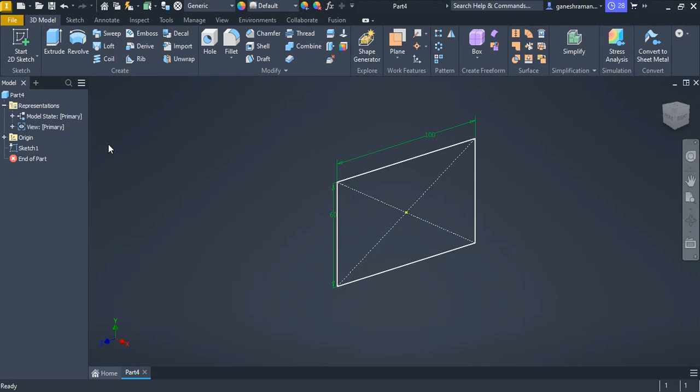First we will make this base part, then make extrude cuts. The radius of this one is R30 and the length is 60 by 100. I'll choose one sketch on right plane, select center rectangle like this, and choose a dimension, this is about 60, enter, and this is about 100. Finish and extrude up to 60, make sure it is symmetrical axis, click OK.

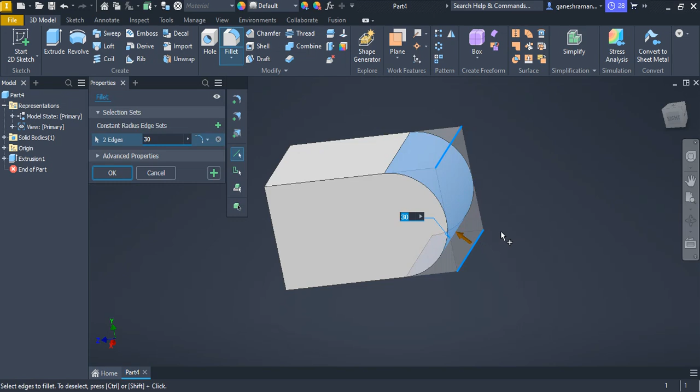Now on the opposite side it is not sharp edges, you can see it is round edges. So for that I am choosing fillet, and the radius is 30. Isometric view.

Next, there are two more fillets which are R5. We will give it here onwards. Fillet R5, select this edge also, click OK.

Now we will make this cutout and this cutout, because it is a through cutout.

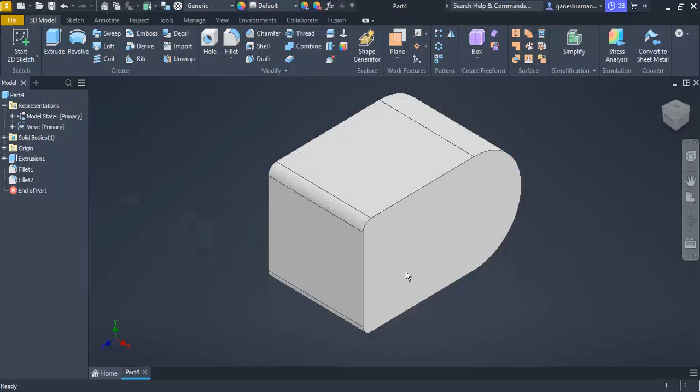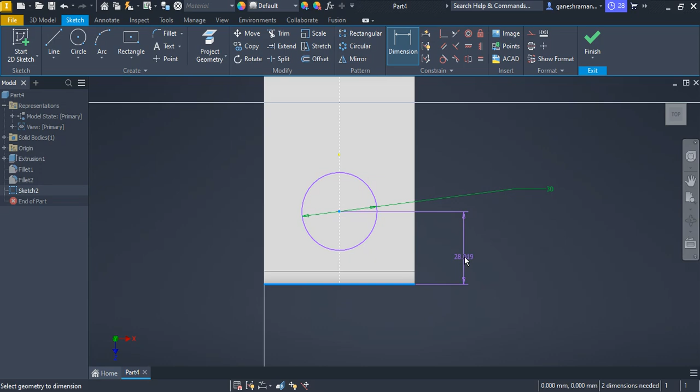Go to this top plane, add sketch, take one circle right here, make one line first and make it into construction. What is the diameter of this circle, which is 30, and what is the distance? Distance is 30 from this to this, which is 30, enter, and make sure this center point of this circle and this line are coincident with each other.

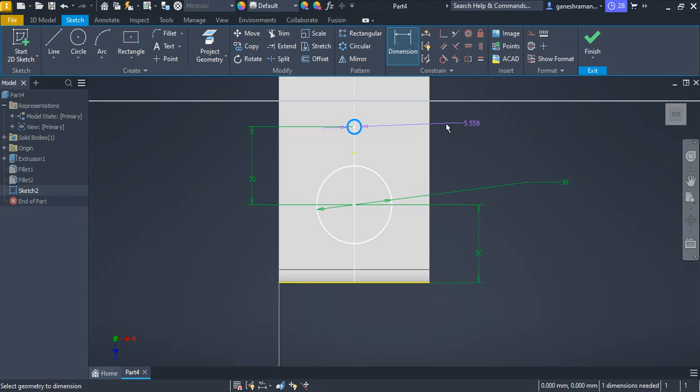We will make this cutout also with 4mm gap, so for that 30. Let's take one line like this and make sure from this center to this end, which is nothing more than 30. Next, make it into construction, select circle which is a diameter of 6, enter, and next 4mm offset, take offset 4mm, enter.

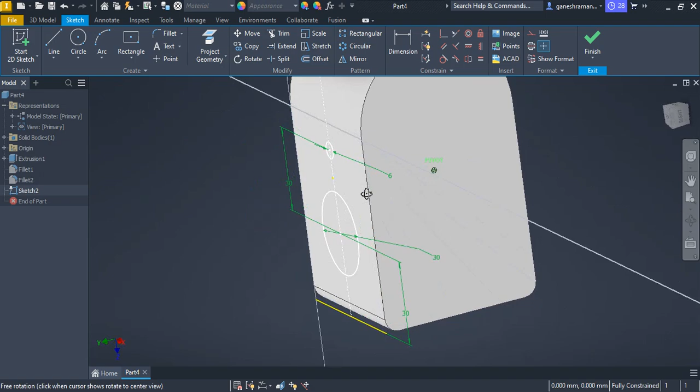Normal view. We just hide it. You can delete it, this line I don't need it. So we will draw it again.

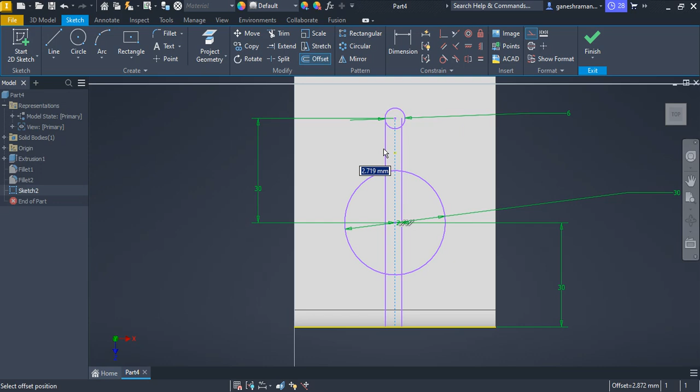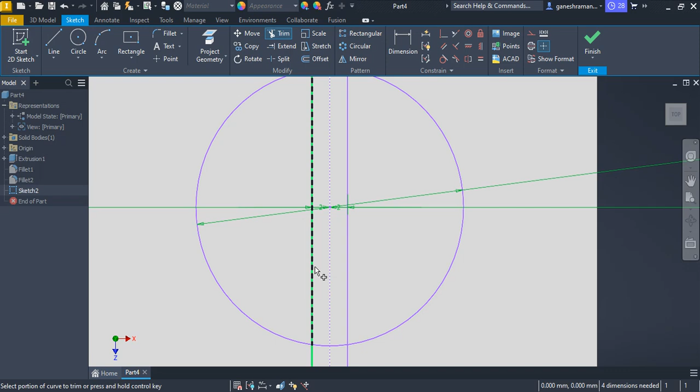Take the offset command and choose 2, enter, select again 2, enter. Now take one more line from here to here, which is for constraining purpose. Trim this and this, trim this also. Let's take one line from here to here, that's it.

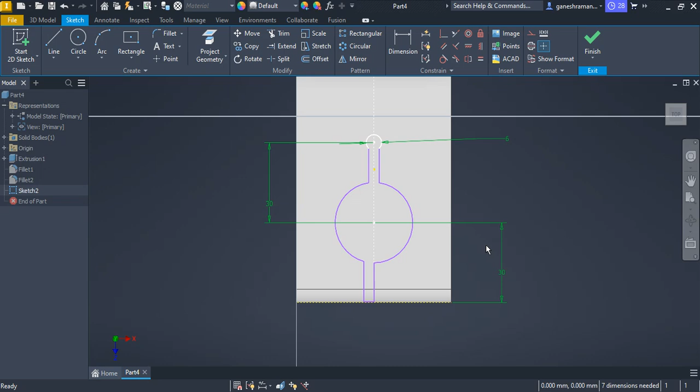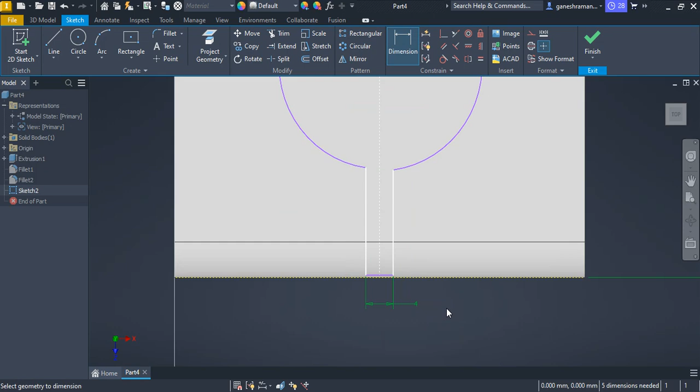Now make sure this center point of this lies in this one, you can see. Symmetry these two lines, the center line, and dimension. Dimension which is not more than, which is 4 only. These two circles are equal.

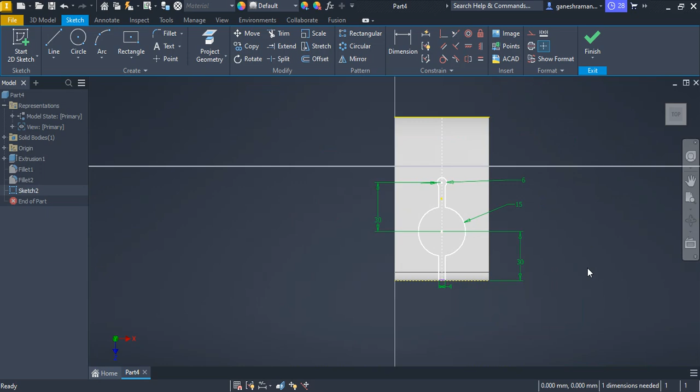Now give the dimension for this, which is diameter 30, so that means radius 15, and collinear these two lines. That's it, every sketch is constrained now, and this is not constrained, we don't need to constrain it. Finish, extrude cut, and remove material up to next, click OK. The first cutout is completed.

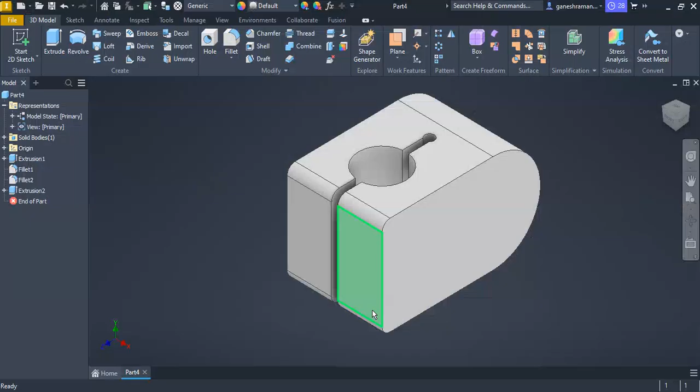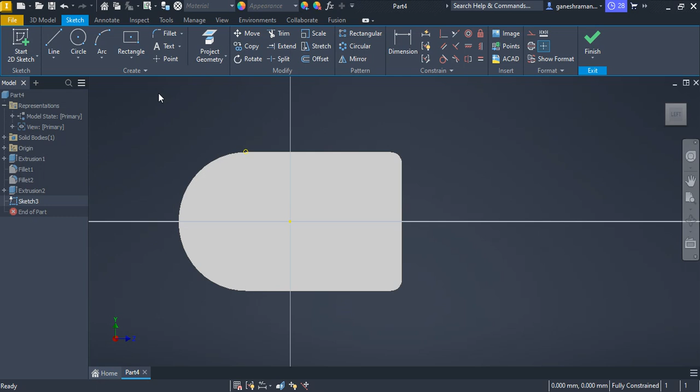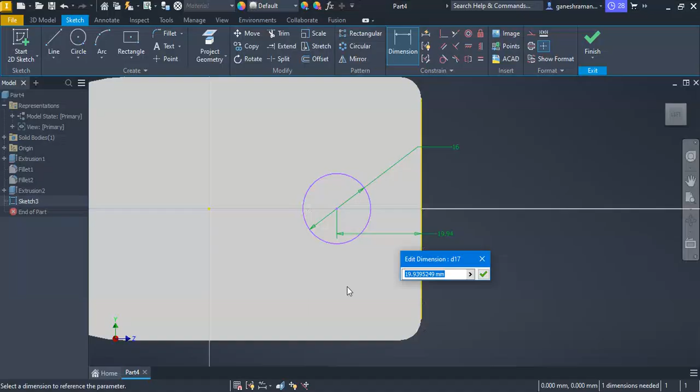Make one line from this edge to this edge, make it into construction, and choose the coincidence, set the center point and this line. Now take two lines, make sure these two lines are tangent. Now trim this and this also. We want to make this cutout only, right?

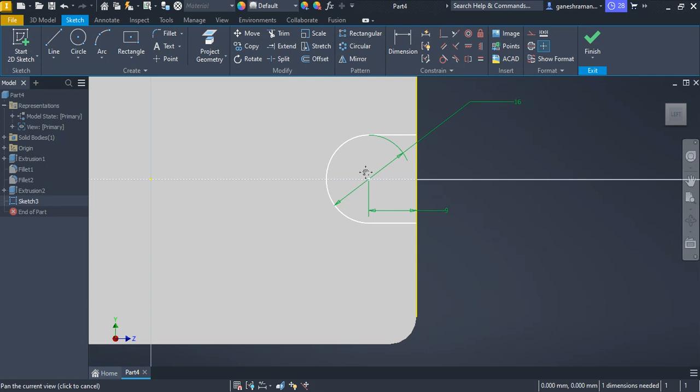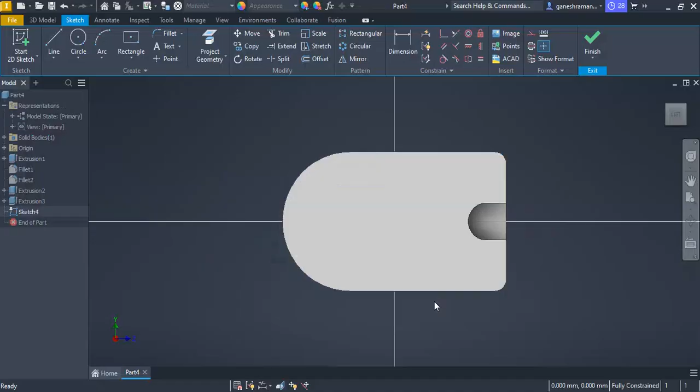Next, finish, extrude 12. Select the surface again, add sketch. What is a 10 diameter circle.

Finish and extrude, remove material up to next, click on OK. So up to next it is not completed, so click on this feature and choose the edit feature option and make sure it is through all, click on OK.

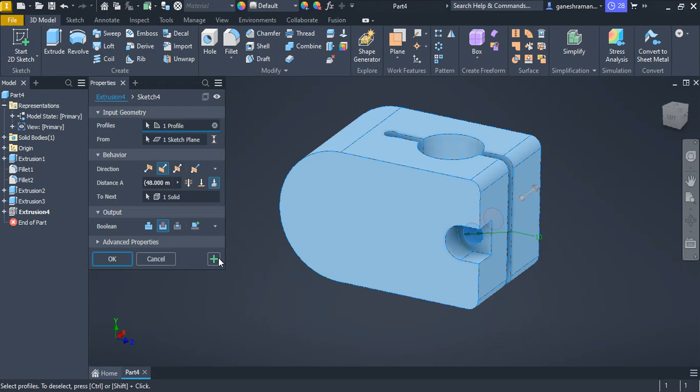Isometric view. The next cutout, we have to make these cutouts.

This seems like the same thing. So what we have drawn for this side, same is here also. So what can I do? I'm just copying that sketch, Ctrl C, and paste it in the same part.

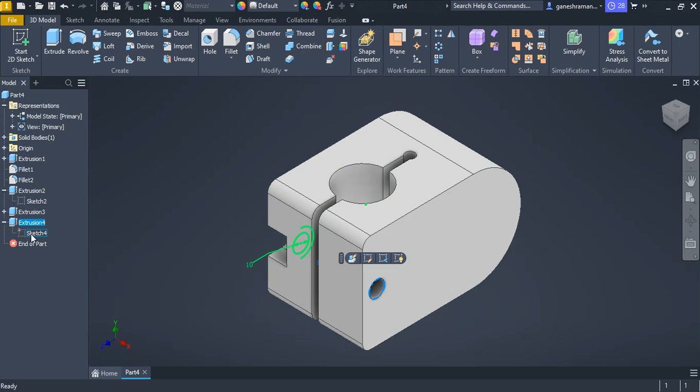Ctrl C, copy, and okay, paste, Ctrl V. So I don't know why it is not working. Origin, Ctrl V. It should work. Okay, it is not working, so we will go on.

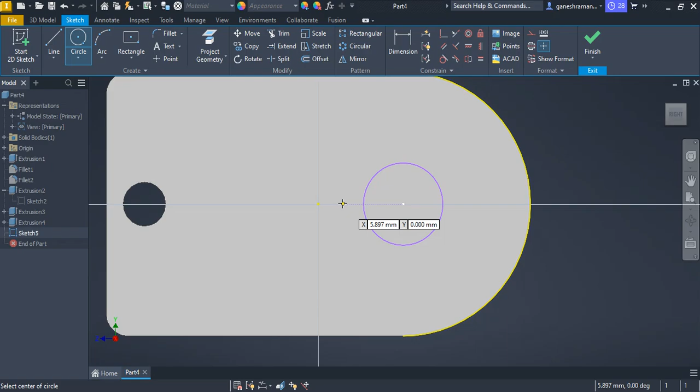Select circle, which is maybe concentric of this one, diameter is 30, we will give it later. Select one more circle, and line command from here to here, and make sure this line is coinciding with this origin.

Dimension 30 from this to this, which is nothing but 30. Okay, 30. Why it is so? That is a mistake again. So it is 130 actually.

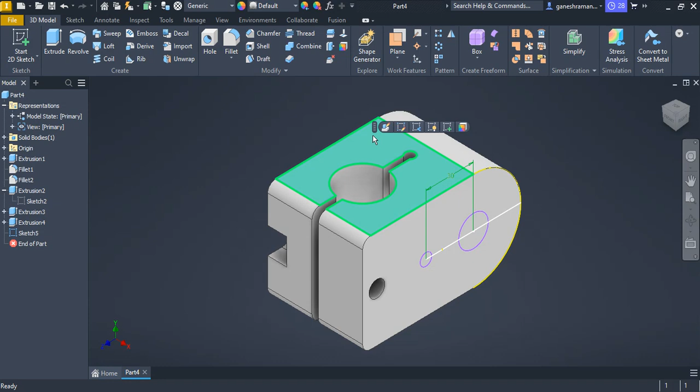So this entire extrusion, first we edit the extrusion, right? So edit sketch, this is 130. Finish. Now it will be okay, right click on the sketch, edit sketch.

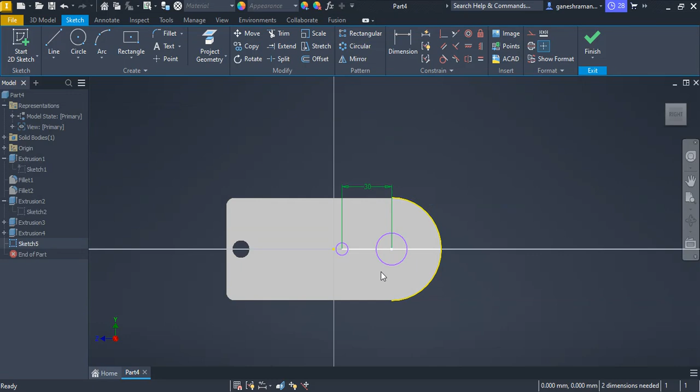So now this is fine, right? Let's make it into construction. Take offset, choose this, and 2 enter, 2 enter. Okay, trim.

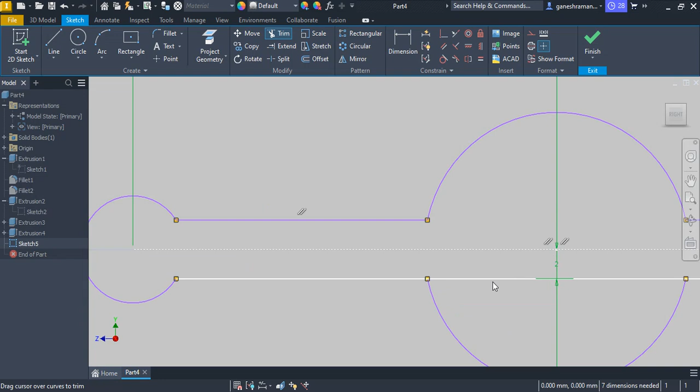So this is a complete sketch. Now choose these two are equal. Dimension, this one is 30, that means 15 radius.

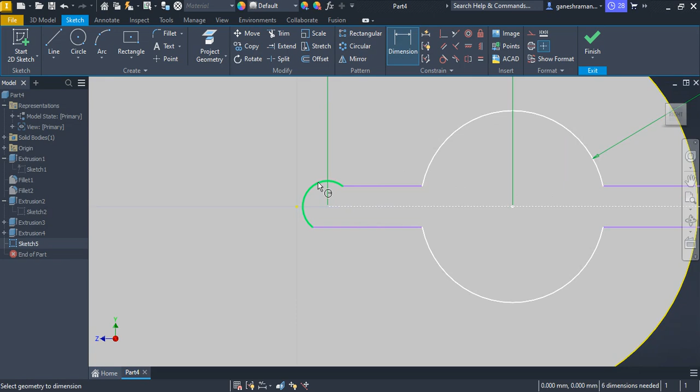See again, and make sure symmetry is these two lines and this line symmetry. Dimension for this one is 6, enter.

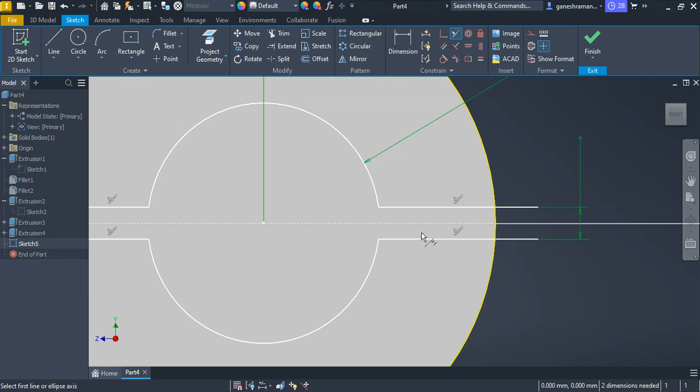4, enter. Symmetry, so no, not collinear. Okay, so everything is constrained, I think.

Trim. Okay, this entire profile I need to cut. Finish it and extrude. This entire section is selected. Subtract, make sure through all. Click on OK.

One more thing is left is this cutout. For that, click on the top plane, sketch, and radius is 8. Diameter is 16. Enter. OK.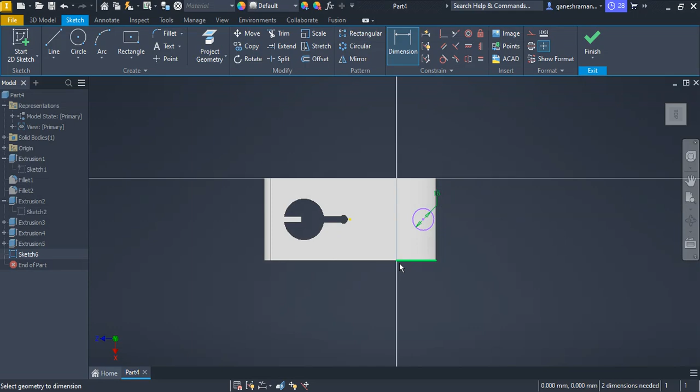21. So this is my center point line. So fine, dimension constraint is still active from this to this, which is 21. Enter. Now let's take one more line.

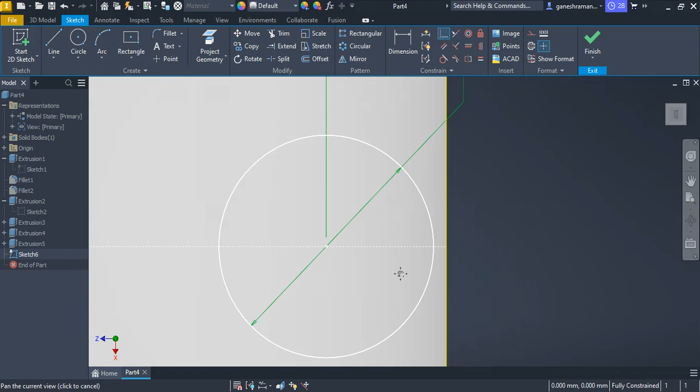Make it into construction and choose the coincidence. Select the center circle and this. That's it.

I think this seems like this counter bore, so we can simply use counter bore. Finish, just delete the sketch, I don't need it. Select the surface and add sketch.

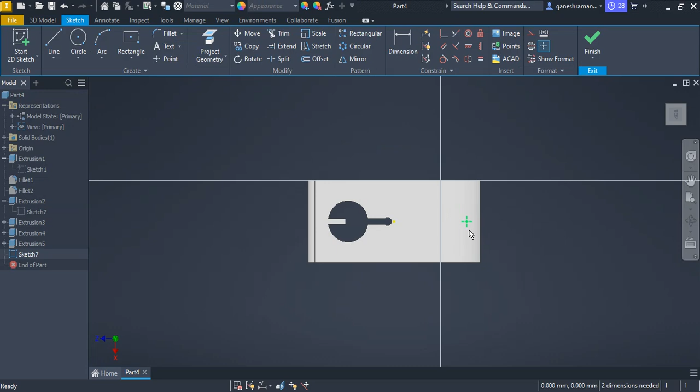Let's take one point only here. Okay, now constrain this point properly. So it is 21, right? And make sure the coincident this point and this origin, so which is not possible.

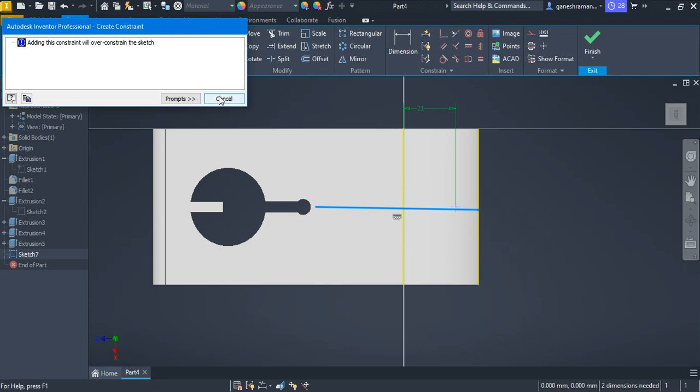Let's make a one line from this center point to this. Make sure it is horizontal. Cancel, delete. Make it into construction and select the coincidence.

That's it. Now choose a hole command and choose counter bore hole. So counter bore dia is 16 and inner dia is 10. Depth is not given up.

Okay, we will do it. So 16 is the counter bore dia and this depth we will keep it like this. We will change it. Now up through all, no, it is through all, up to next condition is not available to this surface only.

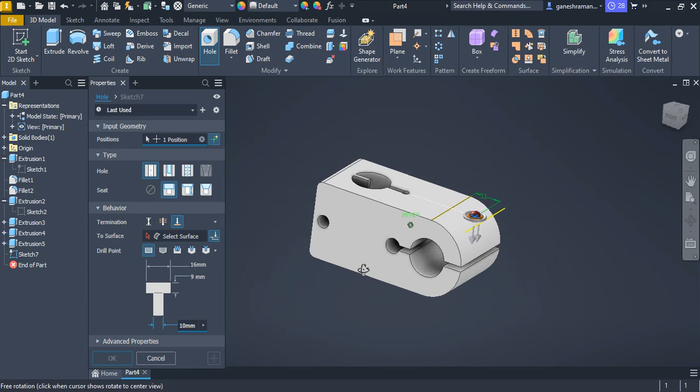So delete this and choose the position as this only, and select the surface is this only. Now increase this value as 15 or 18 or 20, enter.

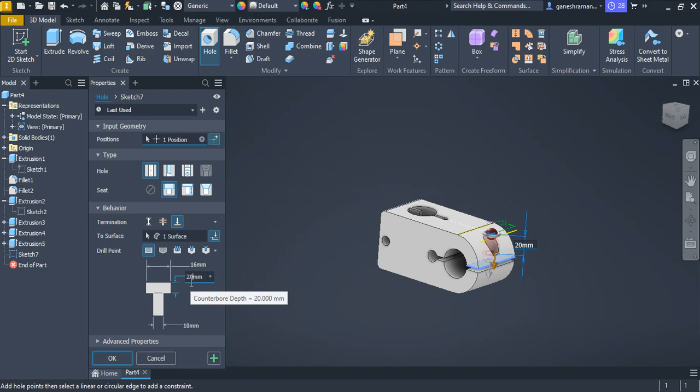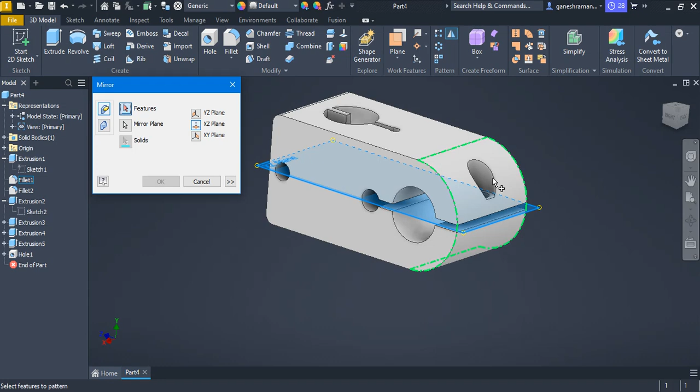The same thing I want to do on opposite side also, but I want to use mirror tool. So use the mirror feature, and the feature I want to select is this one, hole only. I can use the top plane. Features I can choose this one. Now click on OK.

Now if you go to tools, measure from this surface to this surface, you have to get 24, but here only getting 20. That means extra material is cut. So you want to decrease this depth, right? So for that I need to decrease this depth to 2 mm.

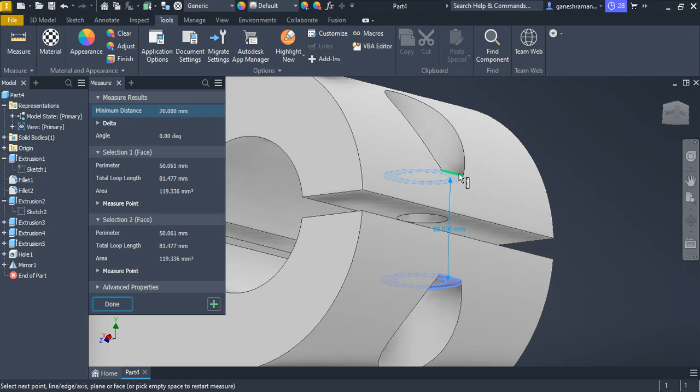So select this feature, edit. Just depth you have to reduce by 2, so which is nothing but 18, enter. Now if you measure it again, this surface to this surface, you will be getting 24. That is what mentioned right here also.

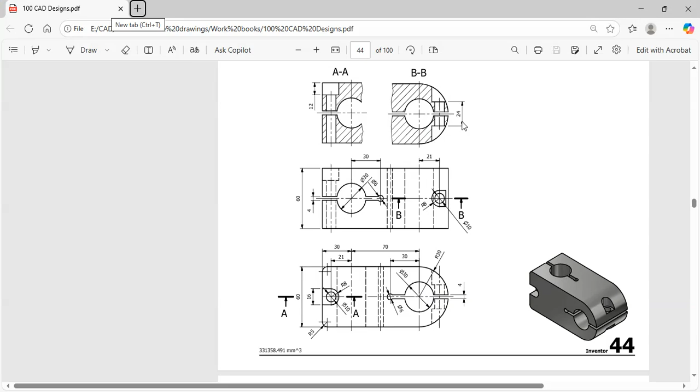Okay, so that's it guys. That's how you can use the measure tool and all other features to make this part.